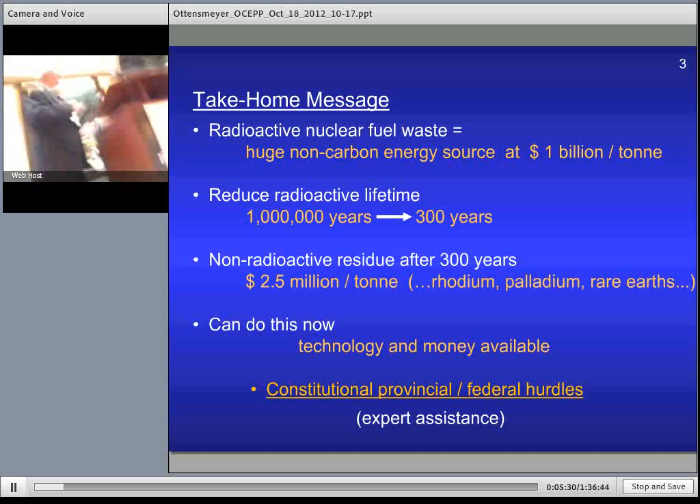So we'll start about looking at what nuclear waste actually is, then indicate where the huge value potentially comes from, because that gives us the incentive to try and do something. Then we'll characterize the nuclear waste, because once we know what it is, it gives us an approach that we can use to extract more energy and do things. People have been thinking about that to some extent, but they've only really tried partial solutions because they have a certain technology to satisfy. But we'll go then directly to the fast-neutron approach and indicate that it's actually existed.

And we can find out what type of fuel utilization has been achieved, and then my calculations that indicate what might be possible. Of course, after Fukushima, there's no talk on nuclear matters that doesn't touch on safety, so I'll do that as well. And then indicate the availability of the technology and the cost, of course. It's always important. So let's start right in.

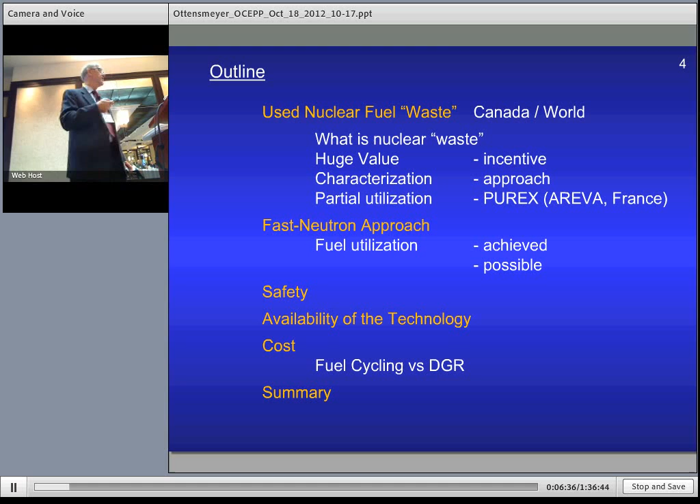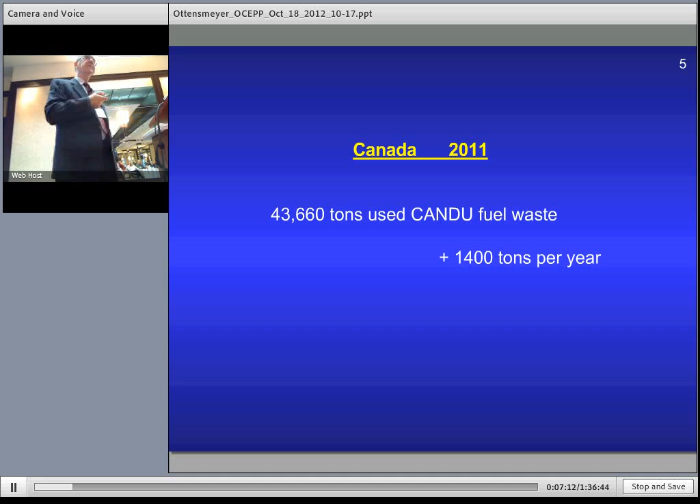Now, we've done studies since the 70s where Professor Hare essentially gave us a report which indicated that we should bury this material in a deep geological repository somewhere in the Canadian Shield. Since then, we've studied the Canadian Shield in an underground laboratory in Pinawa, in Manitoba, and had a panel looking at the environmental aspects and sociological aspects for over 10 years. And their recommendation was to involve communities, because radioactive matters are sort of worrisome in one's mind.

That resulted eventually in the Nuclear Fuel Waste Act, and that created the Nuclear Waste Management Organization. And they were charged within 3 years to come up with a report as to what to do. And so by now we've spent about $300 million or so, and the report says we should bury it in a deep geological repository. Reminds me of 1977. But they were smart enough to say, well, let's do this with some thought. And they chose a so-called adaptive phased management, which says it gives us time. So perhaps I can persuade them to go in a different direction.

A deep geological repository is supposed to be sort of a gallery of tunnels deep underground, 500 to 1,000 meters underground, and it's going to cost us of the order of $24 billion, or if it's twice that size, there's a little bit of economy of scale there, but not much. And following the Seaborn report, they're asking communities to come forward, and they have 22 by now. I think the last report that I've read was that it was 21, so maybe one has been eliminated.

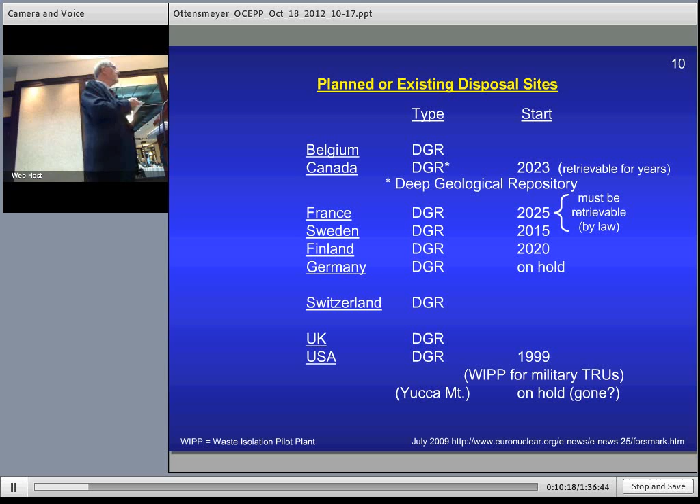And so let's take a look at what this material actually is. Our 44,000 tons have actually only been used to the tune of about 300 tons. And by used, I mean that we've taken the uranium and we've split it to extract the nuclear energy of 300 tons of this 44,000. That's less than 1%, 0.74%. That's why I say it's slightly used.

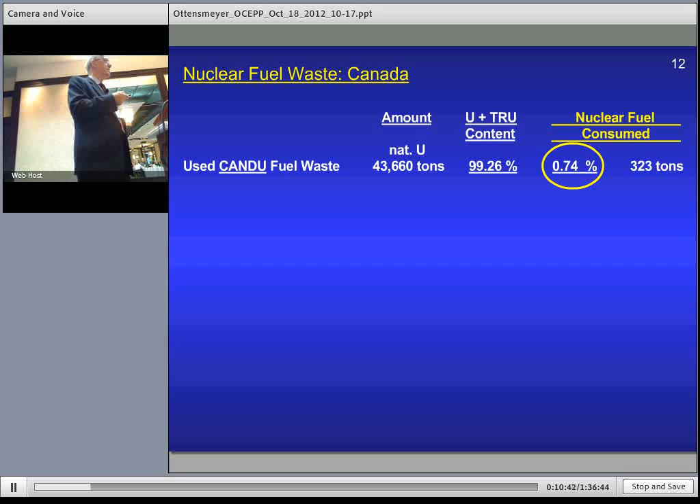The rest of the world seems to be doing better. They have extracted 3.4% out of their so-called fuel waste. But that's deceptive because they use light water reactors, which are less efficient at using neutrons. And so they have to enrich their fuel for uranium-235 that's in the natural uranium. And so what's left is depleted uranium, on the order of 2 million tons that have accumulated since then. And of course, that's not used at all. And so if we consider mined uranium, then the light water reactors have used less than 0.5% of the material.

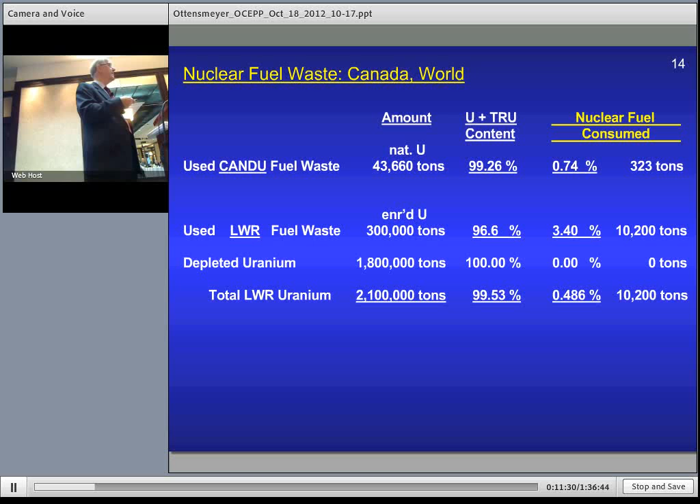And so you can see that the CANDU reactor is a marvelous reactor. It's about 50% more efficient than any other reactor in the world, except the ones that I'm going to talk about. And so even if we add our own contribution, it's still in total less than 0.5% of the material that's been used. So the obvious question is, what if we use more of it, or ideally all of it?

If we take the Canadian case, instead of using the 0.74% that we've used, we use all of the rest of it. And instead of just the 1,400 tons here, we use all of the 44,000 tons. Then that's an easy calculation because it's merely ratios of these numbers. That's down here. And for instance, in terms of the efficiency, we can extract 134 times more energy out of the material than we're doing now.

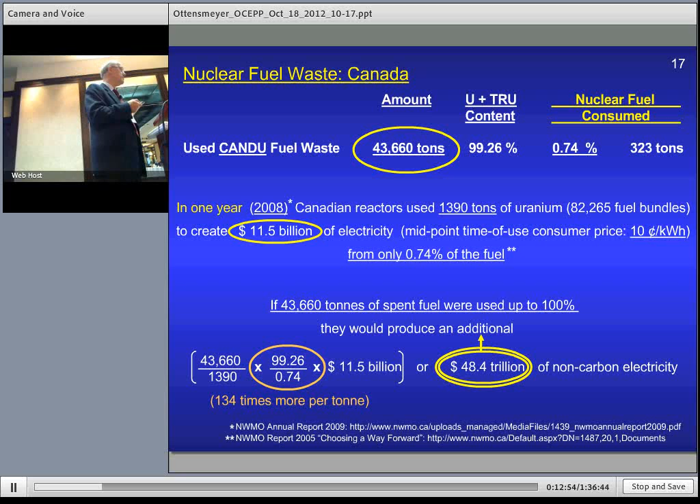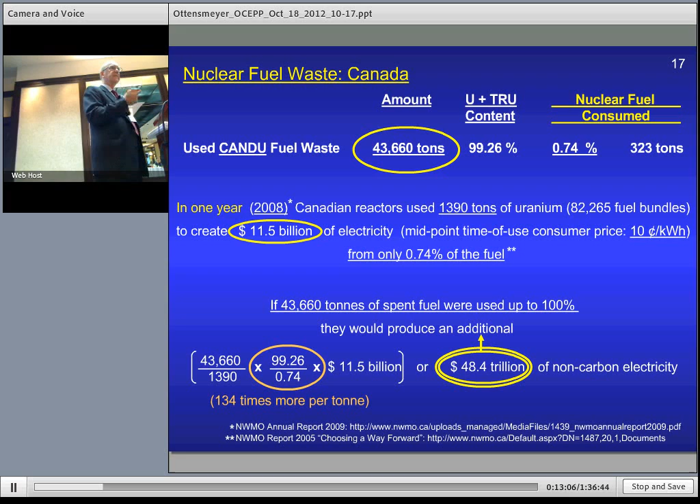And nuclear energy is a lot. So this is enormous. And so if we then take the total number of tons, then the amount of electricity that we could create out of all of that is an additional close to $50 trillion. So I would not call this waste at all. I think it's a tremendous asset. If you look at it differently, this $11.5 billion was created in 1 year, and so the $50 trillion worth would power us at the same level that we create electricity now for over 4,000 years. And we call it waste.

So if you now look at the Deep Geological Repository, which is supposed to cost $24 billion, if we put the material down there and we can't get at it again, then we've lost the order of $50 trillion of energy. And we can make the reactors more efficient so this number can actually go up.

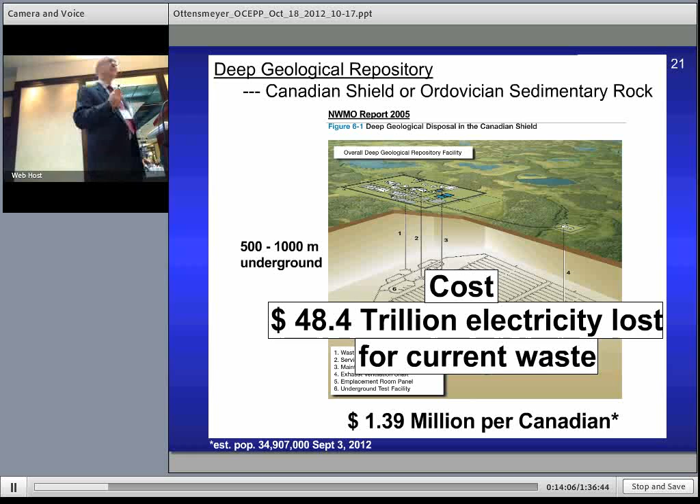Now that's such a large number that I didn't know whether anybody would understand how big that is. And so someone in my lab said, well, that's easy, just divide by the population of Canada. And that means that this amount is $1.4 million per Canadian that we would put down into this Deep Geological Repository. So I would say that I don't want my $1.4 million to go down there. Perhaps you don't either.

So let's take a look at some more detail, and this is where I perhaps become more professorial. The fresh fuel, the uranium, is actually made up of two types of atoms, the uranium-235 and uranium-238. There's very little uranium-235 there, but that's the material that's used in CANDU reactors. It's called fissile because it splits very easily with the slow neutrons that are used in CANDU reactors and also in light water reactors.

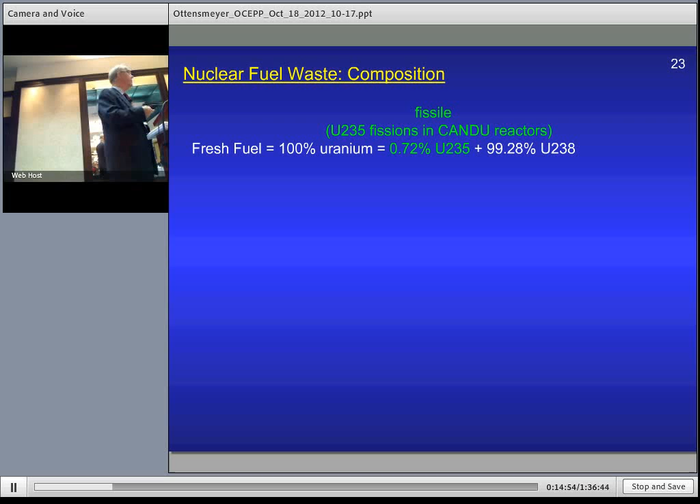Once that material comes out of the CANDU reactor, 0.74% of that has been converted into fission products. Those are the split atoms, and that is indicative of the energy that's come out. So that's 0.74%. The rest is still heavy atoms, uranium and something called transuranic actinides, which actually are atoms heavier than uranium that are created in the reactor.

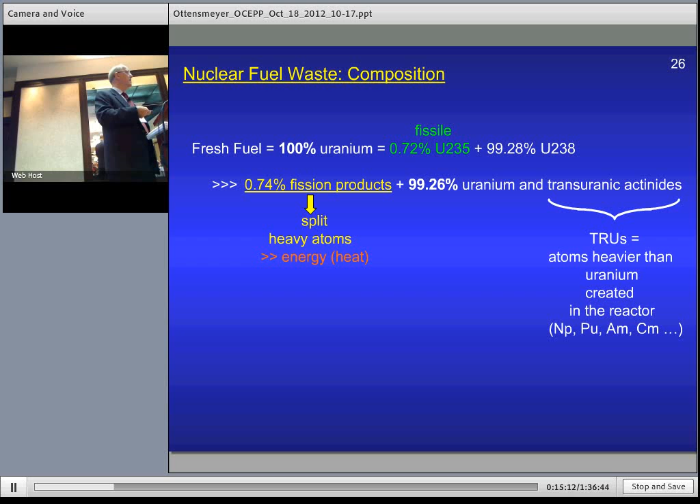If uranium absorbs a neutron, like U-238 does, it becomes neptunium, which then kicks out an electron, becomes plutonium, then americium, then curium, and so forth, and it becomes heavier and heavier. Those are the transuranic actinides. And all of these together have this radioactive lifespan of close to 1 million years.

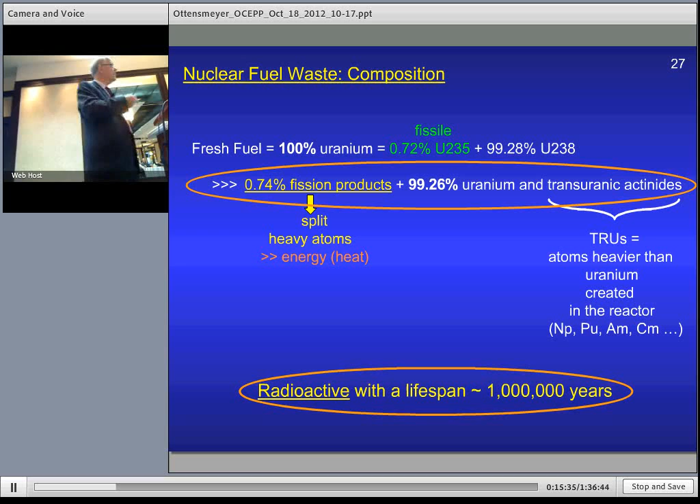But if we look at the details, it turns out that this graph indicates radiotoxicity, which is radioactivity normalized to the biological effect it has. So it's the injurious part. And our CANDU fuel waste, when it comes out of the reactor, and these are factors of 10 here, it's a log scale, is about 1 million times more radiotoxic than the natural uranium that went in. Okay? But it decays away and then stays there

until it reaches the level of natural uranium at about 400,000 years. But the detail is that the transuranic actinides, the heavier atoms that are created in the reactor, are the ones that have the long lifetime. Whereas the fission products follow this green curve and hit the level of natural uranium at less than 300 years. So if we could get rid of the heavy atoms altogether, then we'd be left with just the fission products. And what would be the quantitative benefit in terms of radiation there?

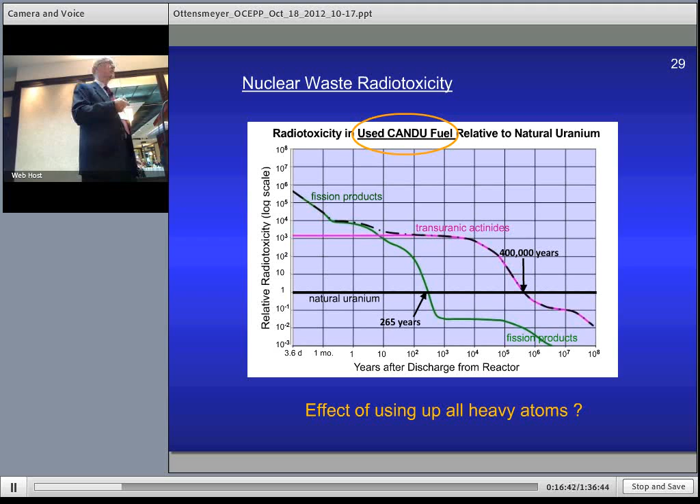Well, essentially at 300 years or so, the radioactivity would be down by a factor of 1,000, but it keeps on going down so that at 1,000 years it would be down by a factor of 42,000. That's a tremendous reduction in radioactive burden.

Or you could look at it differently and say we can reduce the lifetime from 400,000 years to less than 300. And that's a factor of 1,500. That's 3 orders of magnitude. That's an engineering quantity, or almost an astronomical quantity. So that we end up with fission products which eventually are actually 30 times less injurious than the natural uranium from which they were created.

So we have 3 huge incentives here to use up the heavy atoms. We get a very large reduction in the radioactive lifetime, a very large reduction in the long-term radiotoxicity, and we have this 134-fold gain in non-carbon energy. But in addition to that, there's a little bonus for our descendants, because after 300 years, the fission products are essentially non-radioactive. And the 40,000 tons of spent CANDU fuel at that time would be worth the order of $100 billion, or $2.5 million per ton, which I mentioned earlier on, because of the contents of all of these wonderful atoms that are in there and ready to be extracted without having to be mined, because it's already there.

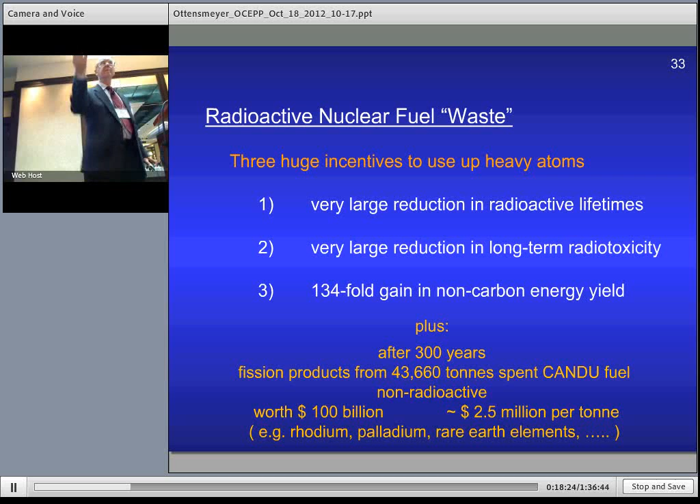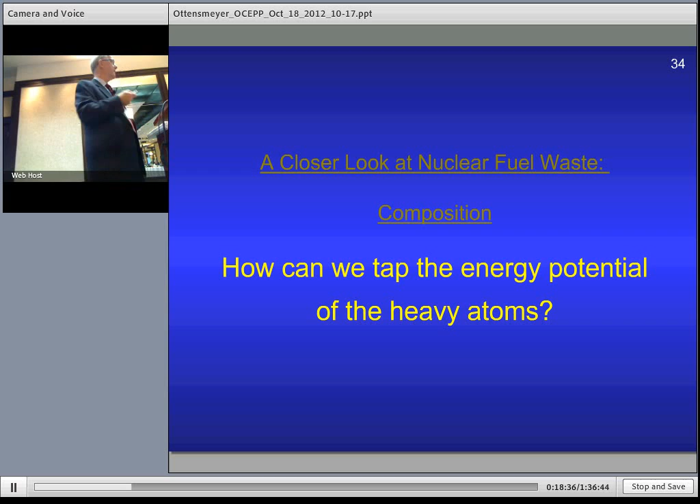So how can we tap the energy potential of these heavy atoms? Let's take a look at my professorial approach again of looking at what the heavy atoms actually are. The fission products have released the energy already, so we're just looking at the heavy atoms. It turns out that, in addition to the uranium that's there, we now have plutonium and americium and curium and neptunium and so forth. But some of these are actually what's called fissile. In other words, the same as the original U-235. And then they can be used in light water reactors, in CANDU reactors, and so forth. And so the world's concentration has been to try and extract these fissile elements.

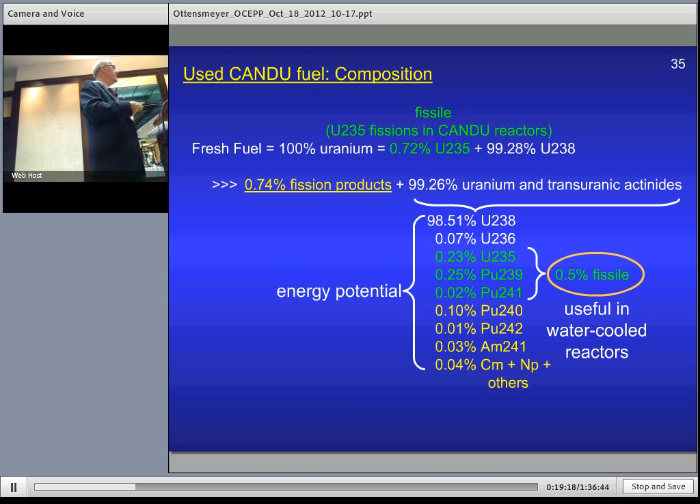What's been tried are things like fluoride volatility, or a chemical process called Purex, or accelerator-driven systems, or laser-driven systems nowadays. But the only one that's really been used is Purex. And it's still being used now by Areva in France to cycle their light water reactor so-called spent fuel, because it has still 0.9% plutonium that's fissile in it. And so they think it's worthwhile to do that.

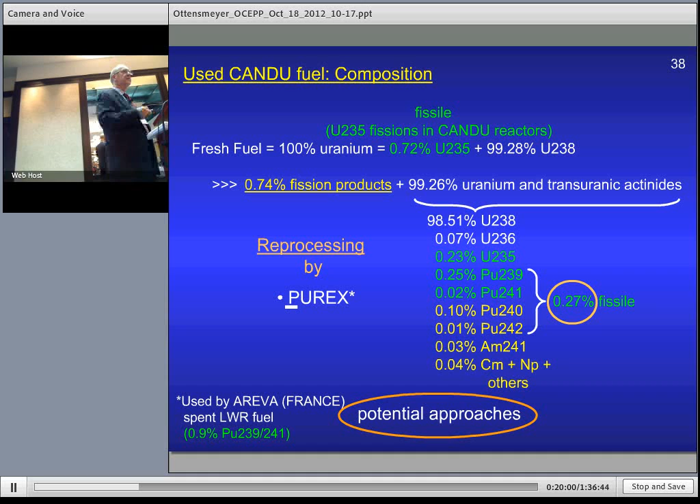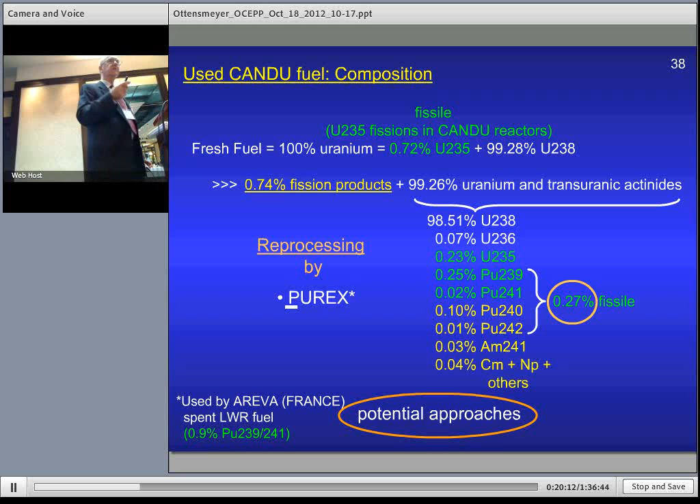If we look at our case here, then the Purex process would extract 0.27% of fissile material in terms of the plutonium that's there. And that's about 1/3 of the original fissile material there. So we can get something more out of it, but it's a major effort. And the Nuclear Waste Management Organization looks at what they call a watching brief and to see what's out there. And they have decided that reprocessing of CANDU fuels would be prohibitively expensive and would require decades of research to prove its feasibility. That's a quote from their annual report.

Now, I'm a university professor in research, so if it says decades of research, I think this is wonderful. But being a grandfather and retired, so I look at my pennies a little bit more, it's prohibitively expensive, and I don't like that part. So is there another approach? And being naive, you might ask, well, why don't we split all of the heavy atoms to extract their energy?

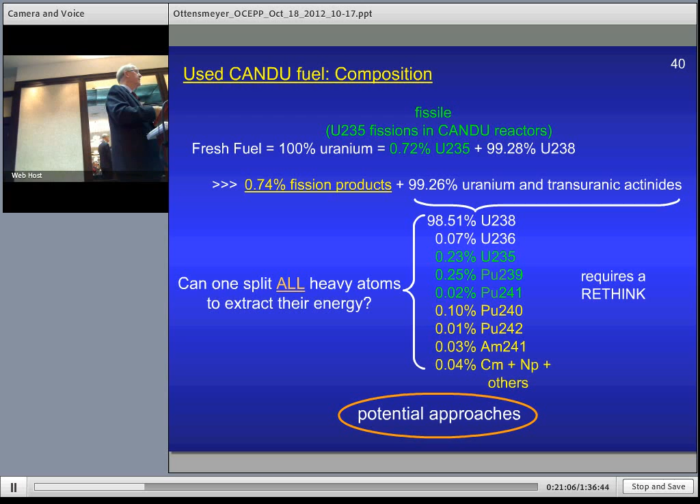No question is ever bad. It's the answer that you worry about. And this requires a rethink, really. And the rethink started with me with a CANDU reactor at equilibrium to see where the energy came from. And I got this from Ben Rouben and also from CanTeach, CANDU, and so forth. I usually put my references somewhere on the slide because I'm not responsible for all of them. I just look them up.

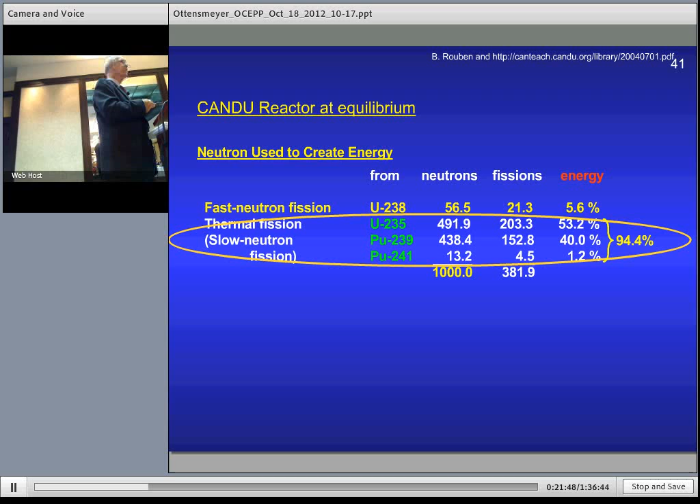And so you find that about 95% of the energy that we get is, of course, from slow neutron fission. We use slow neutrons in these reactors. But the interesting thing to me was that 5% of the energy we actually get from uranium-238, of which we have a lot. And that's by fast-neutron fission. Because when the uranium splits, it gives out fast neutrons. And before those fast neutrons get out of the fuel rod, they find another uranium, and they don't care which one, and split it. Once they're out of the fuel rod, the water slows down the neutrons. And then, of course, they become very efficient at splitting the fissile material. But they don't touch U-238 by a factor of about 50 million.

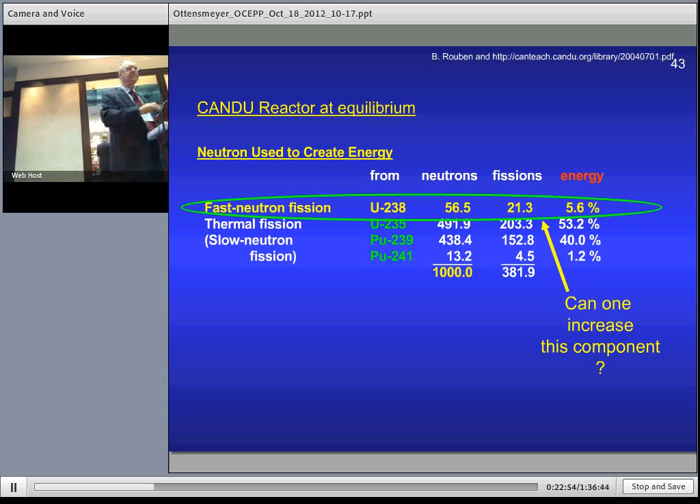So the question is, can one increase this component? And I tried very hard in my calculations on the previous version of this laptop, and I couldn't do it. It was the water that really prevented one from having fast neutrons, because water very efficiently slows down neutrons. And so on the laptop, it's easy to just leave out the water. And then things worked. But that's not an engineering solution. A reactor creates heat, and you have to carry the heat away someplace.

And so, being a metallurgist, I grabbed my metals handbook and looked up low melting point metals. And you're familiar with them. Lead is one of them. It's got a melting point of about 350 degrees Celsius, which is a little high. But this stuff here, solder, works just as well. And since tin absorbs neutrons, you get a solder that's lead bismuth. That works wonderfully well. The Russians have used it. Lead bismuth is expensive. And so an alternative is to use sodium.

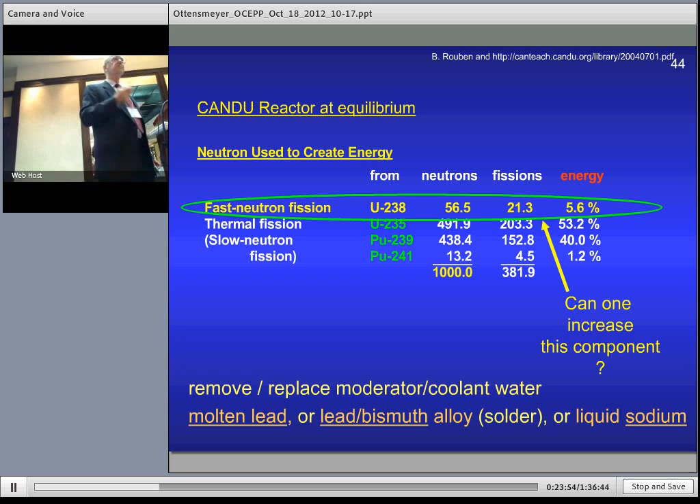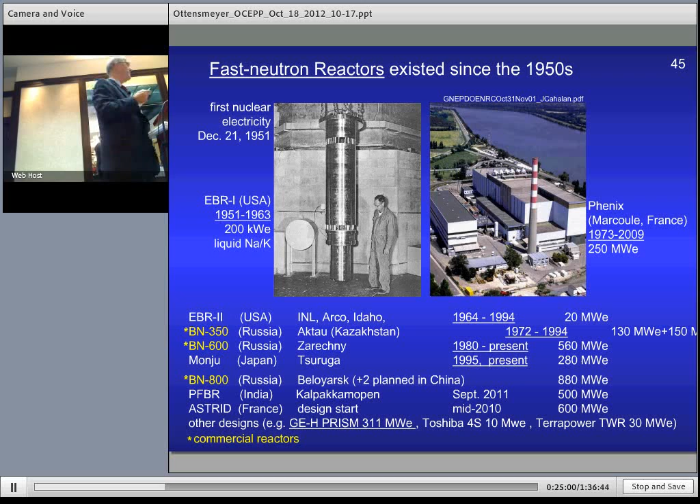But all kinds of reactors of different sizes are fast-neutron reactors that are metal-cooled. I'll talk about the EBR2 in great length a little while later. The French, of course, know where to build them. This is the Rhone Valley there. It's very pretty. We go to Chalk River, and the Ottawa Valley is pretty as well, but it's so far out of the way. It's about a 6-hour drive from where I am. But since these reactors existed and still exist, the Russians have commercial ones and they're still running, how well can a fast neutron reactor use fuel in terms of percentages?

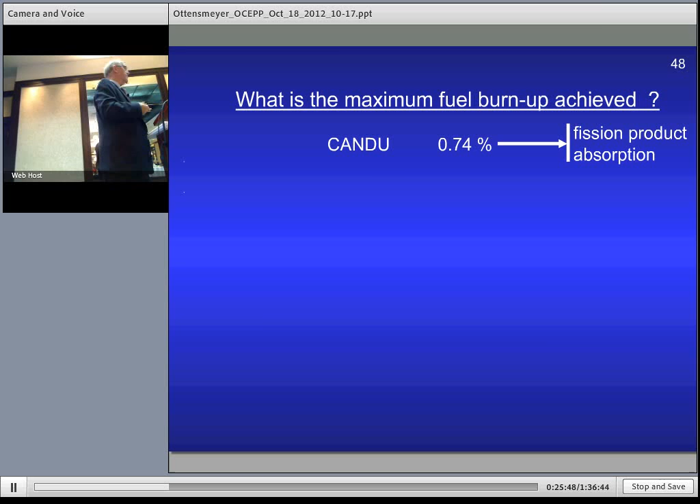Well, the EBR2 gave us lots of data. It ran for about 30 years, and it gave us data on fuel burnup. I'm not supposed to use burnup because it's not really burned. And on fast neutron reactor safety. I'll get into that a little later. We know in the CANDU reactor, the reaction stops in the reactor after about 0.75% of the fuel is used because of fission product absorption. Neutrons are absorbed by fission products. In the fast neutron reactor, in the EBR2, it started out between 1 and 3% and went up to about 25% over time.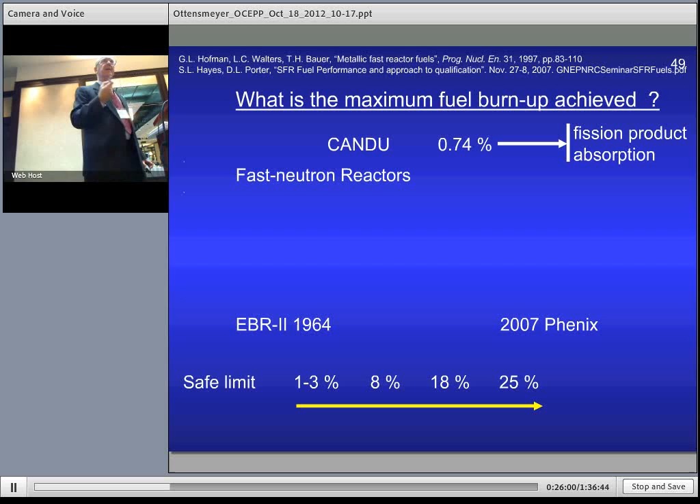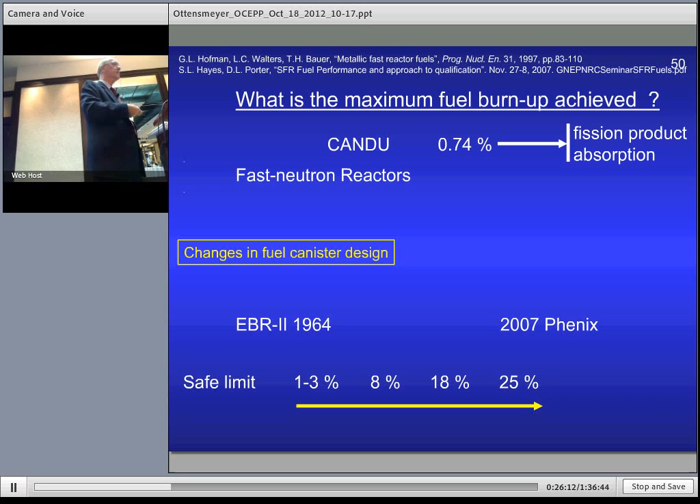And that was not because they built a better reactor. It was because engineers designed a better fuel canister, which is basically this little can here, because a fuel rod is a very simple device. It's a can full of uranium. And in '64, they stuffed as much uranium into the fuel can as they could. And they found that they could use it for about 1 to 3%, which is not really very much better than thermal reactors. And at about 5%, the canister failed. And it failed due to the swelling of the fuel, and that's quite natural.

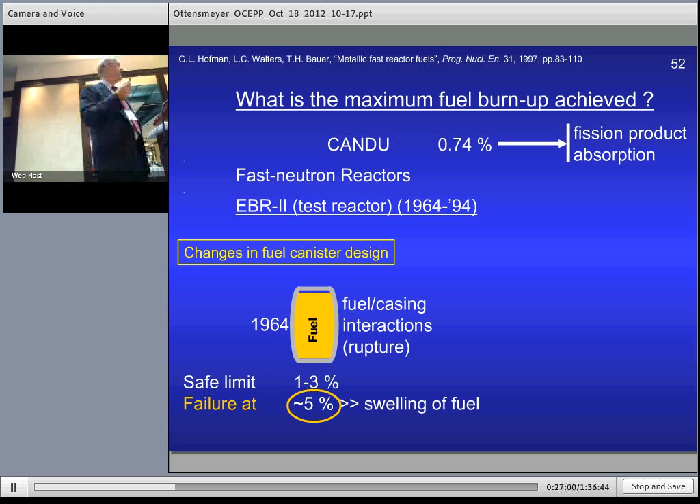Uranium, when it splits, creates 2 atoms. And even though they're the same weight as the original uranium, they're of a slightly bigger volume together. And so as the reaction proceeds, the fuel swells. And so they scratched their head for a while and came up with the engineering solution not to put as much fuel into the canister, but put fuel at a level of 75% of the canister cross-section.

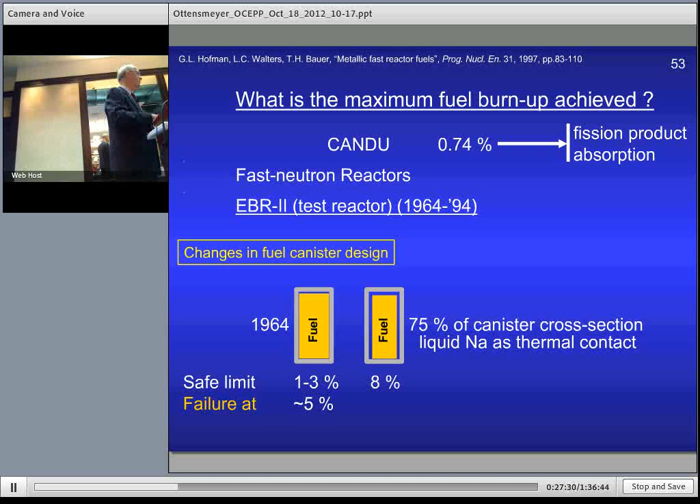And then, of course, it doesn't touch the canister anymore, and you need a thermal contact, so they used liquid sodium inside the fuel canister to provide the thermal contact. And they went up to 8%. And being a test reactor, they tested to failure and found that at around 11%, the canister failed again. And this time due to gaseous internal pressure, because some of the fission products that are produced are gas. Xenon, krypton, iodine, when it gets hot, is a gas or a vapor.

And so, having done this once before, they decided to put a larger space into the fuel canister, an empty space, a plenum, for the gas to expand into. And they immediately went up to about 18% on a regular basis, and they were quite happy with that for the longest time. And they used and recycled about 34,000 fuel pins, that's about 5 reactor loads, quite safely during that time.

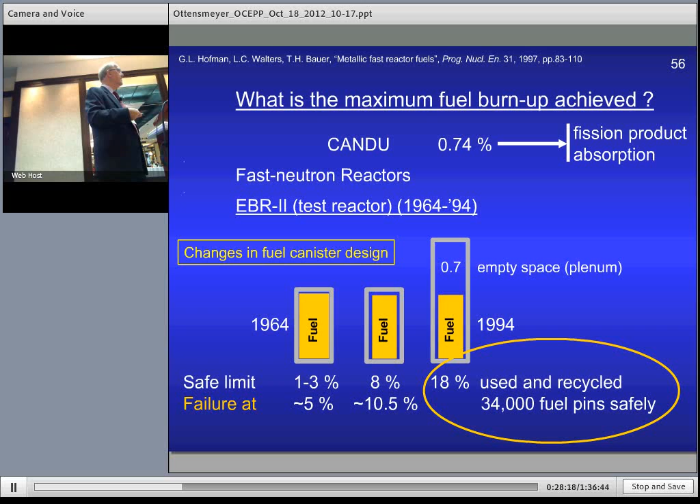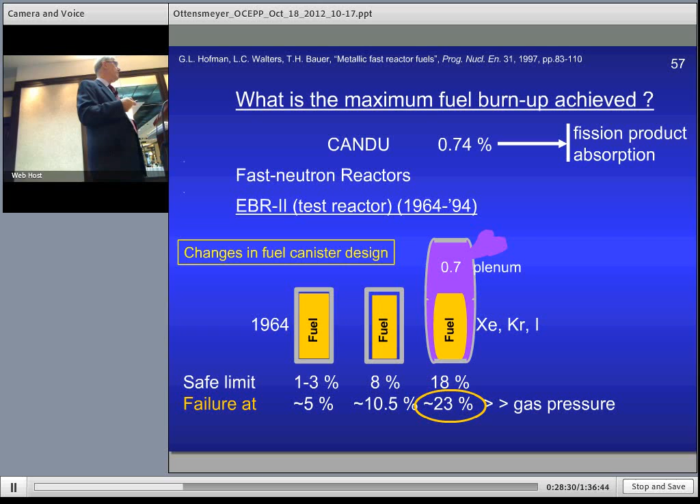They tested to failure again and found that failure occurred again due to increase in gas pressure at around 23% fuel burnup, fuel usage. And so when the reactor was shut down in 1994, the Americans continued the experiment, but now used the French Phenix reactor and designed a canister for about 25% potential burnup. And they achieved that in the French reactor, but they never tested to failure because they were guests in the French reactor. You don't do that sort of thing in somebody else's house.

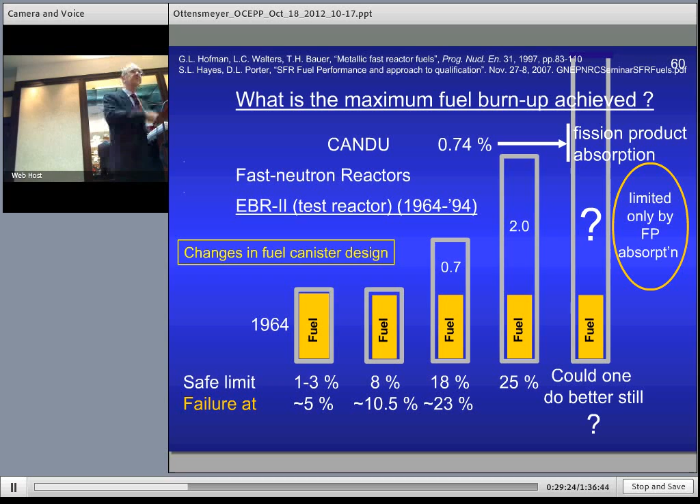And so the question remained, how far can one drive this? Could one still do better? Because maybe the limitation is still pressure inside the can. So if you design an ideal can where the gaseous pressure is not dominant, then you can go to the point where it's neutron absorption by the fission products that are created, because eventually you'll have so many fission products that it'll absorb the neutrons and the reactor just will shut down. And the short answer, after I would say a massive calculation, is about 35%.

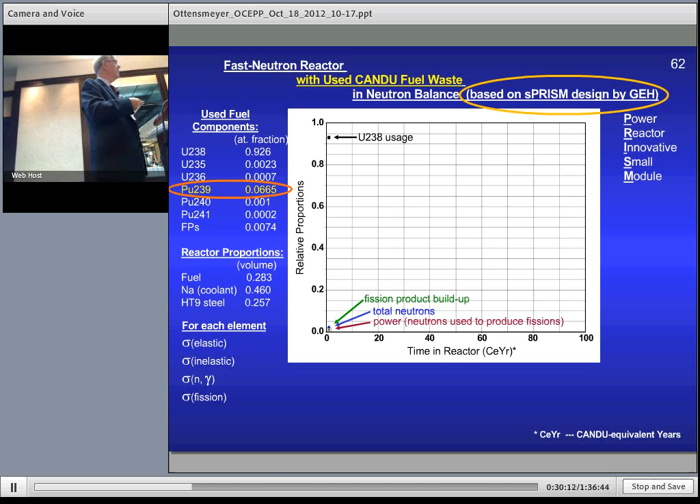And I won't give you the calculation because that'll take about an hour and a half of wonderful data. But I'll indicate to you some of the data. I've got it for all of the different elements with respect to time in the reactor of this fuel. I'll use U-238 because we've got a lot of that, and then indicate the fission product buildup and the neutrons used to produce fissions, because that's the power that we get out of a reactor. Okay? And so the CANDU refuel point would be right about there after 0.75% of use of the fuel. In this reactor, it keeps going and going and going, and it stops eventually asymptotically at a close to 50% fuel usage. That's pretty big.

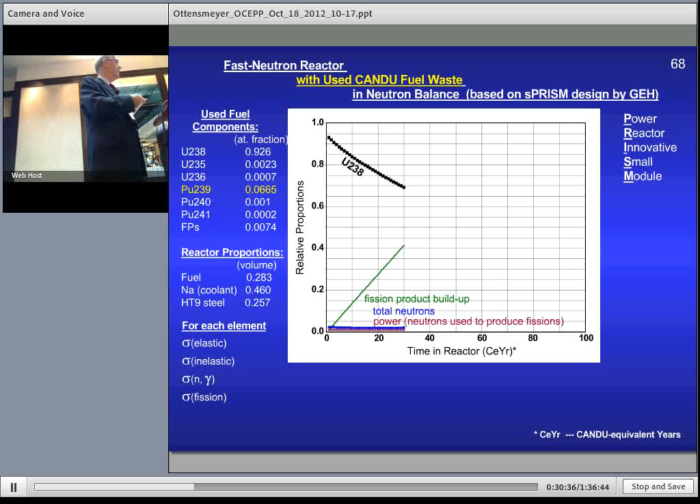But if we want to create electricity, then we want the reactor also to remain constant in power. And so since we've got that data but squashed on the axis here, let me expand this. And you see that we can keep the power constant up to a certain point, and then it just sort of decays away because the fission products absorb too many neutrons. And so this would be roughly where you want to refuel. Now at that point, you haven't used up 50% of the fuel, but only 36%. Now I say only 36%. That's about 50 times more than what we use in the CANDU reactor.

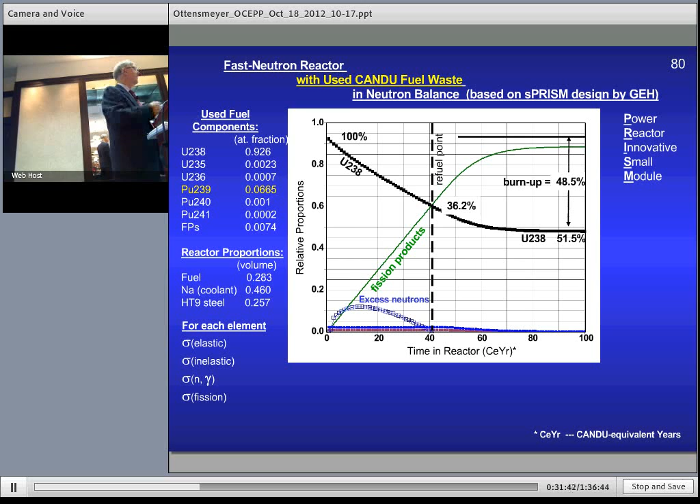Now the reason that we can't maintain the power is that to control a reactor, you actually need a few extra neutrons, which you regulate then with the control rods. And so you have excess neutrons, which you regulate the way you normally do, until the fission products become so copious that they absorb too many neutrons, and the excess neutrons go to zero. So at that point, then you refuel. Then you take out the fuel bundles in this particular case, extract the fission products, because the fission products are what stop the reaction. And then you put the rest of the heavy atoms back into the reactor. Now, we've used up 36% in this case of the heavy atoms. So we want to top this up back to the original charge.

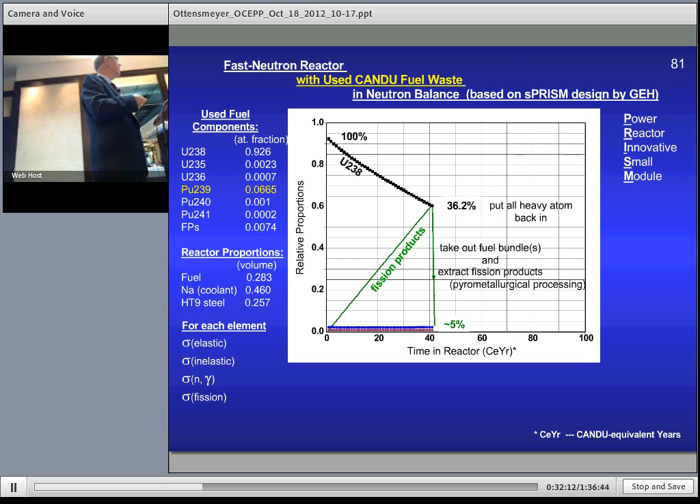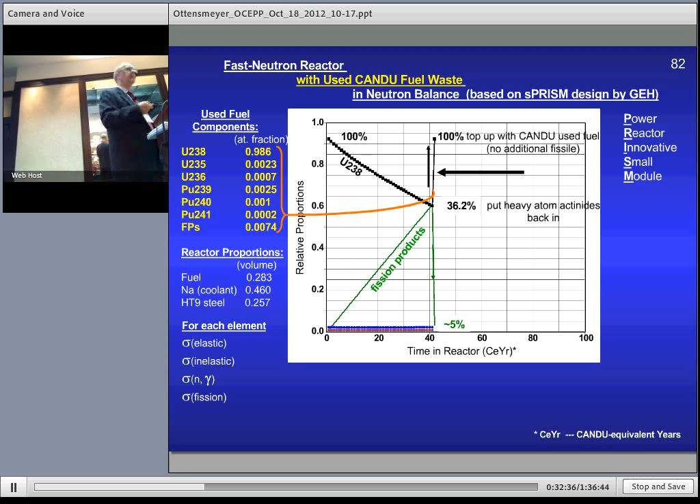And for that, we use CANDU used fuel, because CANDU used fuel is mostly uranium-238, which we've used up quite nicely. And then it's got all of these other transuranic actinides, and it's got some fission products, but less than 1% fission products doesn't bother this reactor at all. I mean, it can go up to 36% by weight of fission products. So that's nothing. It's just like fresh fuel, basically, as far as this reactor is concerned. And then you just keep on going and going and going. And every time that you do this, you use up about 35% of the fuel, which is replenished using just plain old used CANDU fuel, waste. And so in 3 cycles, we would have used up 1 reactor full of CANDU fuel waste completely.

Now I've got one of the transuranic actinides here, the plutonium-239, as an example. Now you know that builds up in the CANDU reactor, and so do the other actinides. But you see here, it sort of increases slightly and then goes back down as the U-238 goes down. Some of this gets used up. And by the time you refuel, you're back at exactly the same concentration that you started with. So it doesn't increase at all.

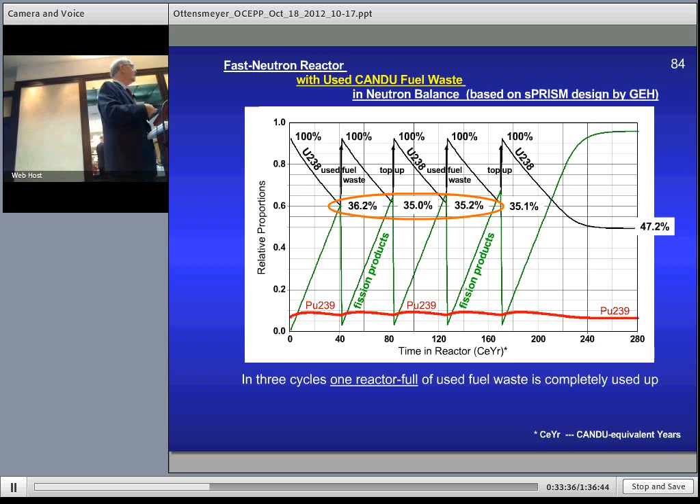If we look at the other actinides, plutonium-240 behaves exactly the same way. Plutonium-241 this way, and uranium-236, which is created from uranium-235, comes in and then gets used up as well. This reactor doesn't care whether it's a fertile material or a fissile material. It just splits them. There's one thing I should mention here, and that is the plutonium-240 content in relation to

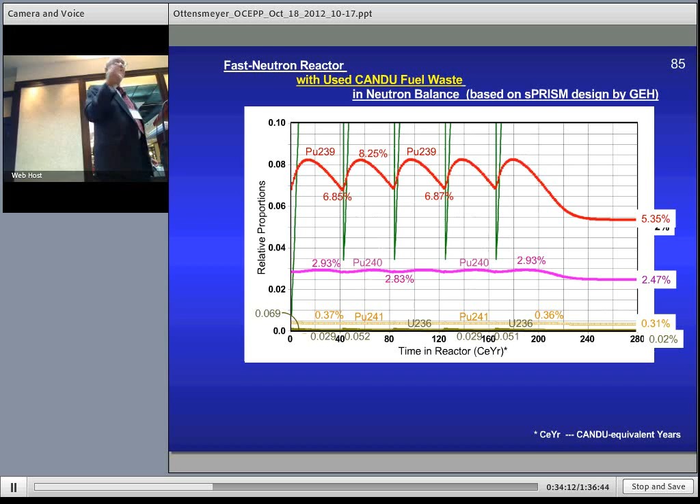plutonium-239. This is what makes this process relatively proliferation resistant, because you can't use this material to build a bomb. You need high purity plutonium-239. And here you've got the order of 30% of plutonium as plutonium-240. So it just doesn't work that way.

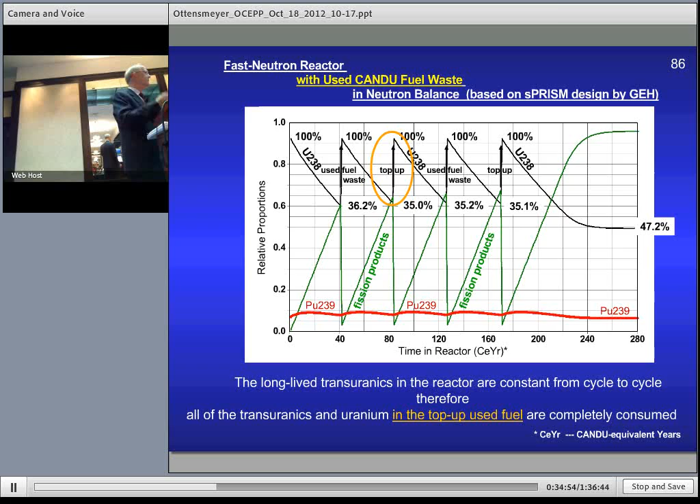So since the long-lived transuranic actinides in the reactor are constant from cycle to cycle, except for this variation within the cycle, we can say that all of the transuranics and uranium that come in with the top-up portion are used up at the end of the cycle completely. And so that means since they're used up, that also eliminates the long-term radioactive burden that is in the current spent CANDU fuel. So if we look at this curve again, the transuranic actinides are gone, and we're down to this particular situation.

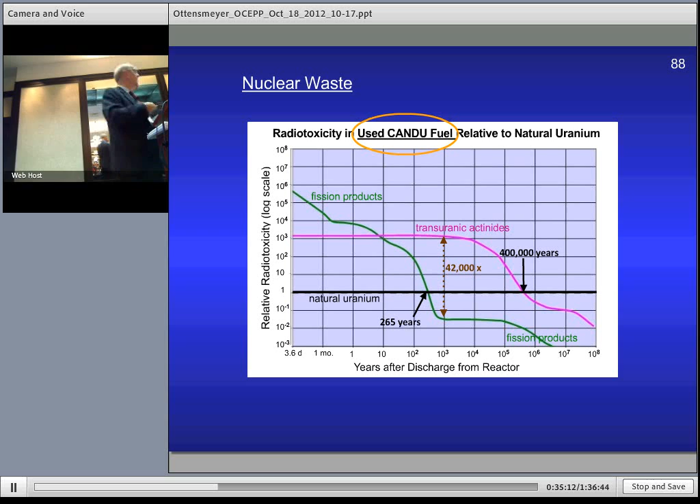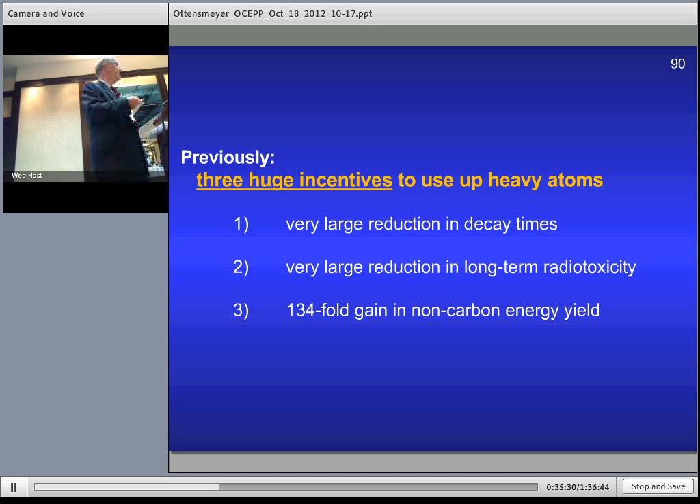So if we look at our 3 huge incentives that I indicated before, we've actually achieved that with using a waste-consuming fast-neutron reactor. And so we can now ask some practical questions. Is a fast-neutron reactor safe? Or can we build or purchase one? We can always build one.

You know, the EBR2 plans are actually sort of in a book you can get in the library with machine drawings in it and dimensions. It's amazing. Can we build an efficient fuel cycle facility? And then finally, how does such a fuel cycle process compare to putting the material down into a deep geological repository? I indicated that the EBR2 in its life, the 30-year life, also provided data on fast-neutron reactor safety.

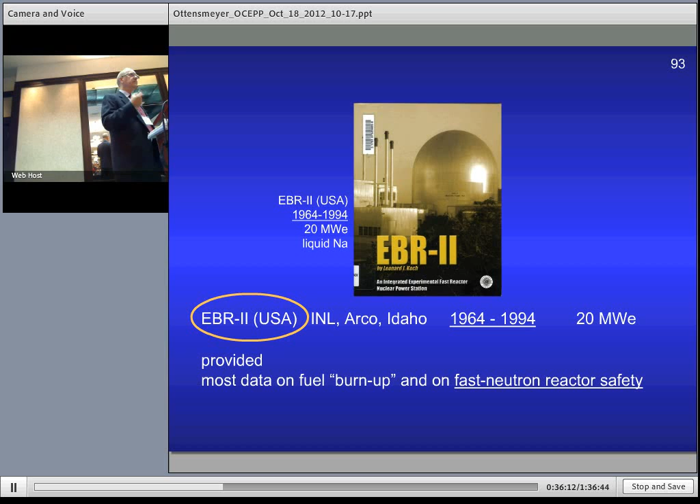And this is very important. The reactor itself is sort of partially underground, and it's the square little box, which I will enlarge next. But in 1986, during its life, they tested this reactor under electrical blackout conditions. That's very similar to what happened in Fukushima, because they lost their electricity, they lost their batteries, they lost their diesel generator backups and so forth, and so there was no electricity. And so they simulated this, obviously, before Fukushima.

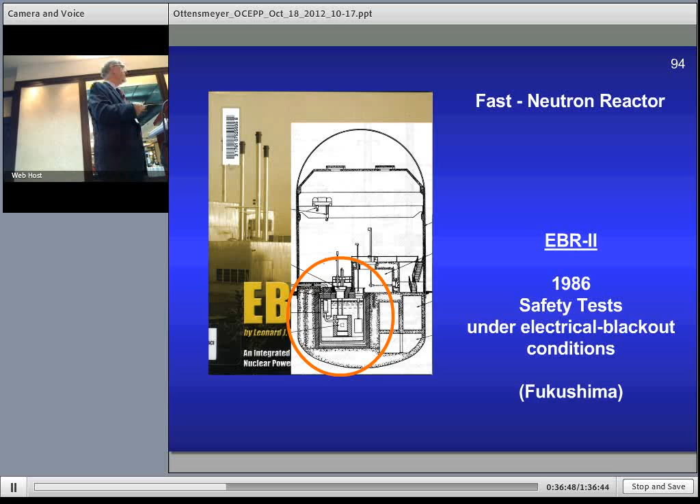This is the reactor tank here. It's basically like a bathtub without a stopper in the bottom, so it's solid. The fluid really can't get away. Any access is via the top lid. The reactor vessel itself is submerged in the liquid, in this case liquid sodium. It could be lead bismuth. And it's got a primary pump here, which pumps the fluid through the reactor core, past the reactor rods, and into an intermediate heat exchanger here, which has a circuit which takes non-radioactive liquid sodium in this case, and heats it up and pumps it out. So all of this is non-radioactive because it never enters the core.

One could use an organic liquid here if you don't like liquid sodium. That's been used in Whiteshell by our own AECL. So that exists. And what they did in their safety tests was inactivate the pumps and also immobilize the control rods. Now, who would do a foolish thing like this? But they did it. And you'd expect this thing just to heat up and melt down.

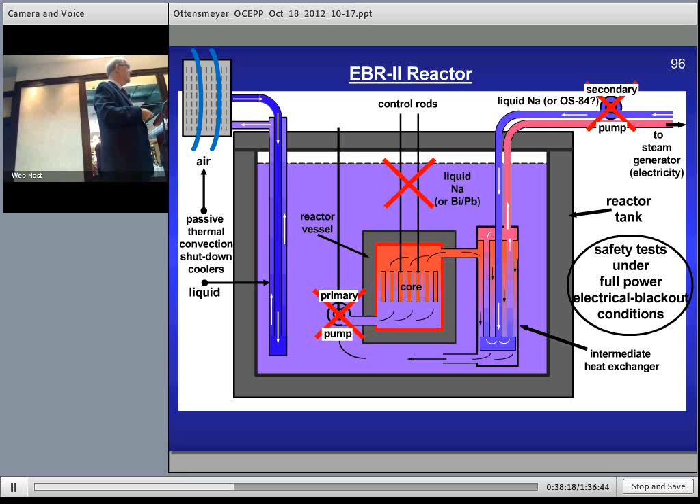Well, the beginnings of that perhaps worry you. This is where the experiment started here at 0 time, and the temperature went up and up and up. But when it reached 750 degrees from 470, it turned over and went back down again, and within about 5 minutes it was back down to where it was normally operating and below. In other words, the reactor shut itself down, even though they had shut off the pumps and inactivated the control rods. I think that's marvelous. It has such a strong negative temperature coefficient that as this went up, the power just shut off.

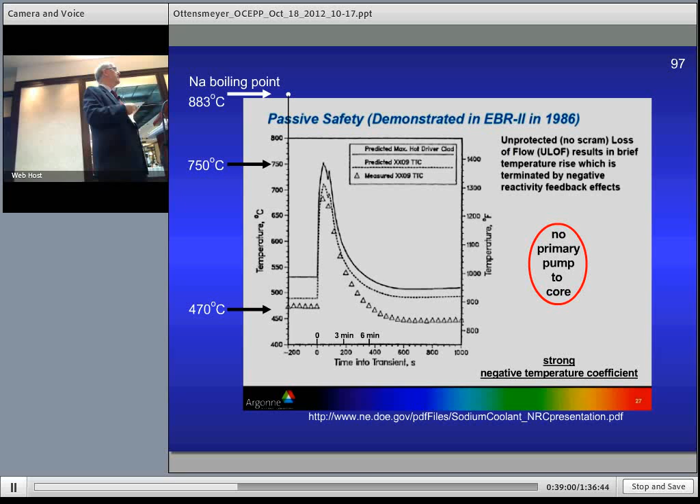Now in Fukushima, the problem was really the decay heat removal, because once you shut the reactor down, which they did in Fukushima, the fuel rods still emit a lot of heat, and they do that in a reactor for the order of 2 weeks or longer before it's reasonably down. So in this case, what happens? Well, obviously the

liquid in the reactor tank heats up, but they actually installed already, for normal circumstances, for normal shutdown, 2 thermal convection coolers, which required no power at all. It was just the property of the liquid. As it heats up, it rises, becomes lighter, goes out of the reactor building, and the heat is dispersed by a second thermal convection cooler by air. Hot air rises, it's heated up and goes through, and then the cold liquid comes back down and so forth. And they had 2 of those.

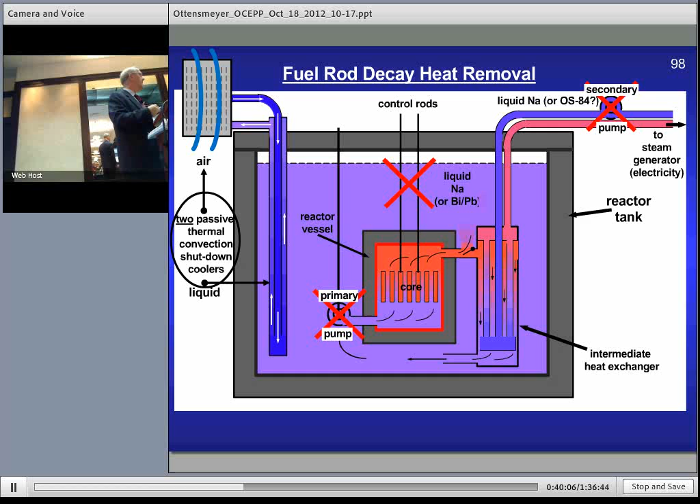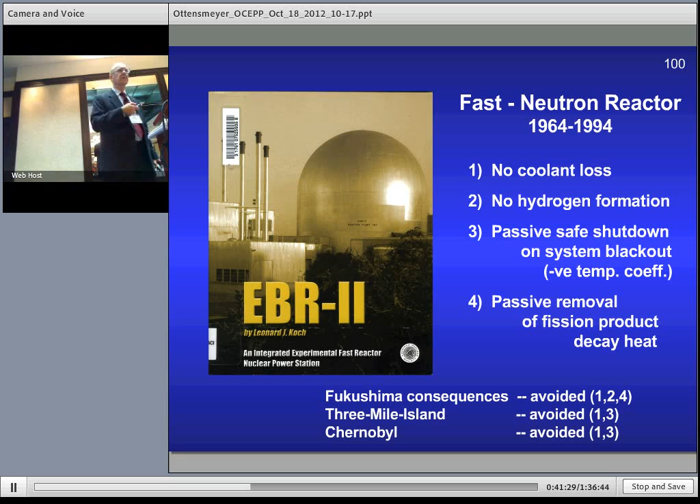So, in effect, we had safety features which gave you no coolant loss, which was important in some of the other accidents, no hydrogen formation, because obviously there's no water here. It shut down passively on system blackout because of the strong negative temperature coefficient. And we had passive removal of fission product decay heat. So this reactor would have avoided the Fukushima consequences for 1, 2, and 4 here. It would have avoided the Three Mile Island problems because there was no coolant loss there. And similarly, Chernobyl, there was no coolant loss in this reactor. And that was operating from 64 to 94. So I think it's fairly safe.

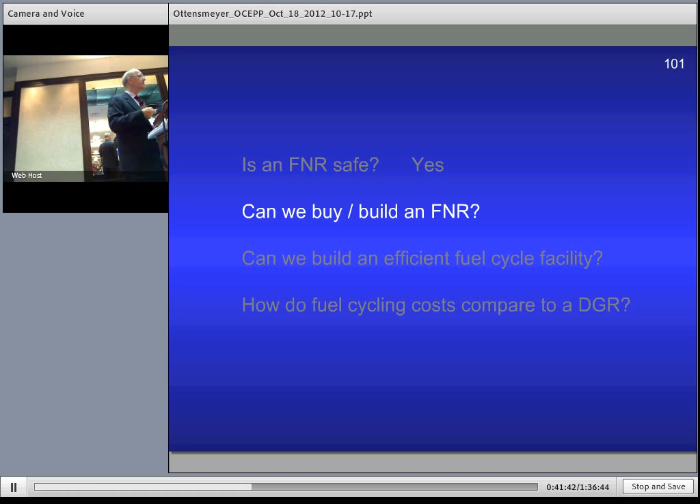Can we buy or build a fast-neutron reactor? Well, we can always build, but it turns out that we can actually buy. We can go to the Russians, who have reactors, the Indians. We can go to the Japanese, who shut down theirs lately. We can go to the French. And so, maybe one closer to home appeals to you more. And it turns out that GE Hitachi designed the PRISM reactor.

So I went to them and said, what does it cost? And they said, well, it depends on the country and the various ifs, ands, and buts, and so forth, and environmental problems and lawyers and so forth. So they wouldn't give me an answer. But they're offering this reactor to England, to the United Kingdom, to take care of their excess plutonium. And they are going to give that reactor free, except they're going to charge them for every kilogram of plutonium that they use up.

But in the process, one of their executives mentioned in the newspaper, and I couldn't find it immediately, but I remember it quite well, that this reactor would be equivalent in cost to one of the large light water reactors, and that's about 1,000 megawatts. Since this one is 600 megawatts, then it's about a factor of 1.5 more in cost. And since this is a first of a kind, we can compare that to historical reactors. In Russia, for instance, comparing their reactor to a Russian light water reactor, it was about 1.5 times more and so forth, and 25% and 30% more in the various other countries in these comparisons. So that's sort of reasonable. It should be cheaper once we build more of them.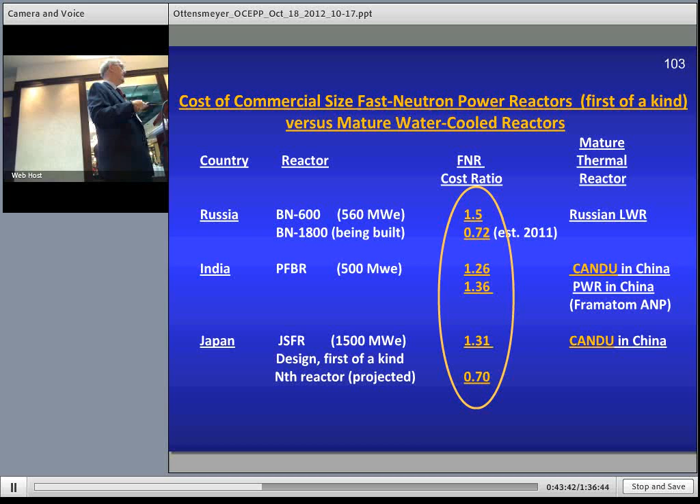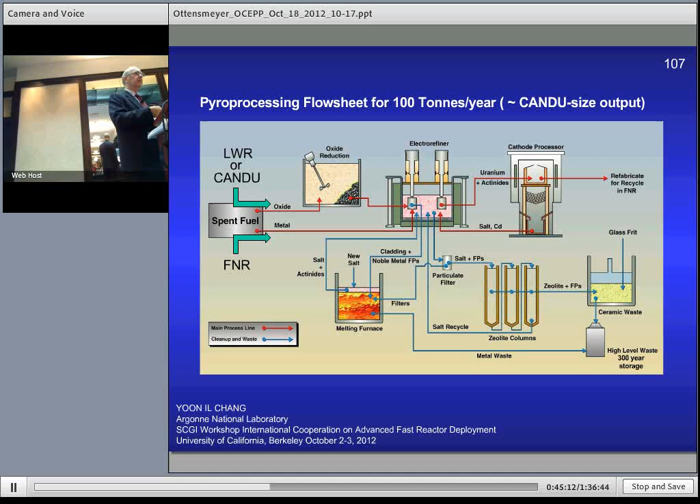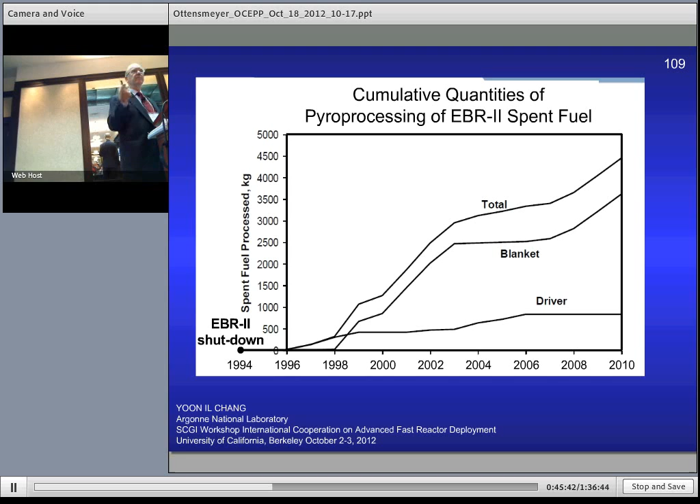And this is not illusory, because these things actually exist. This is the electro refiner, obviously before it was put into operation. And a smaller version of this has been working since 1996 on the EBR-2 spent fuel, once they shut it down in 1994. And it's still operating, as you can see here, probably go higher than this in 2011 and 2012. So it's not something that doesn't exist except on paper. It's real.

So you can ask, how efficient is it? The Argonne people indicated that the current version of the pyro process features efficient, more than 99.9% recovery of the actinide elements. That means that those elements have been taken out of the fission products, which is what we're interested in. And that says that the long-lived actinide content in the fission products is reduced by a factor of 1,000 or more. And what does that mean in terms of radioactivity? Well, the radiotoxicity at a factor of 1,000 is back down to natural uranium metal. And so since it'll be 300 years before we want to get at the fission products, we've got 300 years of chemical expertise to use to try and do better than this. Okay, but we can get it down to that level already, which is good.

So how do fuel cycling costs compare to a deep geological repository? Well, Till and Chang at the Argonne, since they're operating that thing, made an estimate for a 1,000 megawatt reactor, and the facility would cost of the order of $100 million. It's a lot of money, but once you realize how much electricity you can produce with this fuel, it turns out that the cost is about 0.4 cents per kilowatt hour.

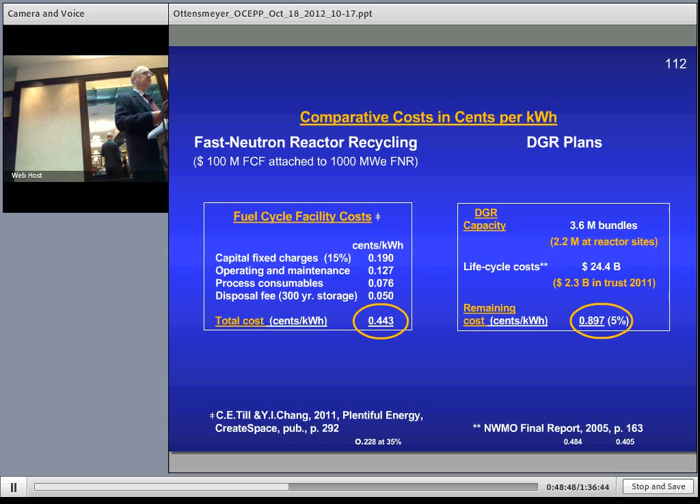So we've got 1.4 million bundles to go to collect the rest of the somewhere $20 billion in future. So the remaining costs, assuming that they don't put it under a mattress but actually earn some interest from it, would be of the order of 0.9 cents. Interest isn't very high at the moment, so this is reasonable. You can calculate for a different number as well. But that says that the fuel cycling approach for a fast neutron reactor is about less costly by a factor of 2 than disposal in a deep geological repository.

But there are human factors as well. I mean, we've got these 22 communities somewhere in northern Ontario and Saskatchewan that want to have one of these deep geological repositories because, you know, there's $24 billion attached to that somehow. But if we look at that and say, well, instead of a deep geological repository, why not build them a fast neutron reactor and fuel cycle facility? That has tremendous advantages. It gives them highly skilled jobs for, well, Pickering and Bruce are examples of what kind of jobs there are. Whereas the Nuclear Waste Management Organization indicates that most of the local jobs are going to be transport and service and catering and this sort of thing. They're going to be of the order of hundreds of jobs according to their triennial report in 2008 to 2010.

In Pickering and Bruce, of course, it's a collection of plants, but the U.S. estimate is that one has about 500 highly skilled people working per plant. And that's going to last centuries because we've got lots of used fuel to process. Whereas once we've built the DGR and filled it, the jobs are gone. Whereas in this case, if they have something that produces energy, they can use it and they can sell it. And we know that the more energy you use, the higher your standard of living. So this is going to increase their standard of living tremendously. So I think it's a real advantage.

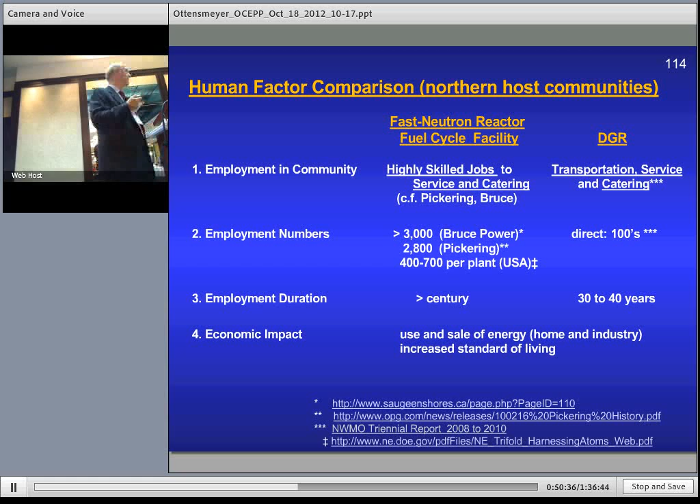So I've indicated to you that waste management is about 2 times less costly than burying the material. Never mind that you create electricity and reduce the radiotoxicity. I've indicated that the technology is available today. It's not something that's decades down the road. And I'll try to show you that we actually may have startup funds for this from the Nuclear Waste Trust, those $2.3 billion that have been collected.

Because the Nuclear Fuel Waste Act, in Section 20, that's what created the Nuclear Waste Management Organization, says that, if you'll forgive the breaks here, that's all the legalese and the boilerplating in there. This is just the heart of it. If a new technological method is developed that has been reviewed by experts from international governmental organizations, we can't do it ourselves, we have to get other nations into it and receive their support, then the Nuclear Waste Management Organization may propose this new approach for the management of nuclear fuel waste. Well, those funds are for the management of nuclear fuel waste. So if we can just persuade them that they should go in this direction, we have potential funds available.

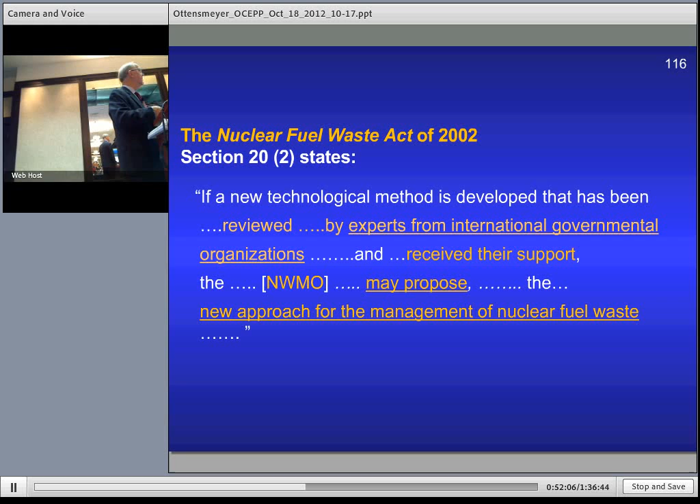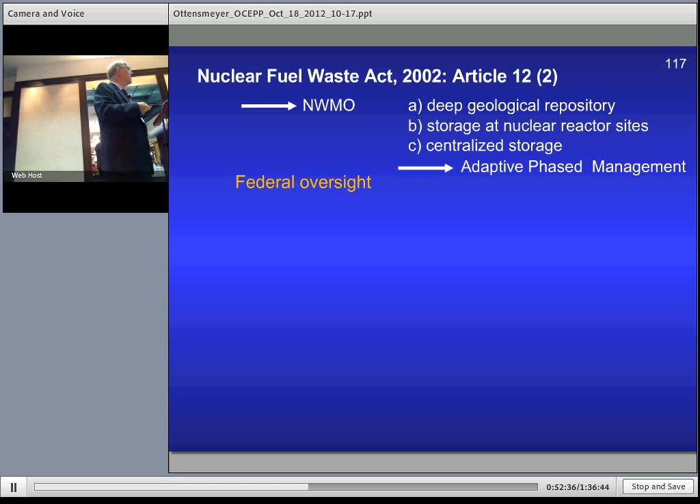There's a problem, of course, that the Nuclear Waste Management Organization has its marching orders from the Nuclear Fuel Waste Act, and that says look at a deep geological repository storage or centralized storage, and they wisely adopted a combination of things and a go-slow approach called adaptive phased management. But when I go to the federal people, because this is federal oversight basically, then they hesitate if I say, well, I want to eliminate the nuclear fuel waste productively by producing electricity at the same time.

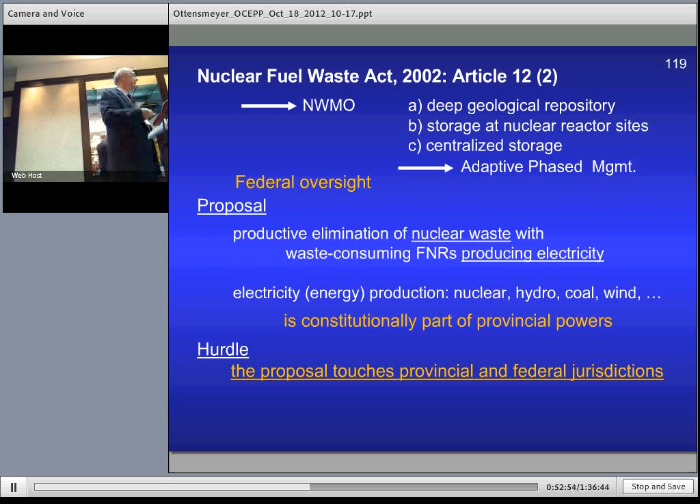And the reason they hesitate is that we've got a constitutional problem, because electricity production or energy production, whether it's nuclear, hydro, coal, wind, or anything, is constitutionally part of provincial powers. And so the proposal here touches both the provincial and the federal jurisdictions, and that's a little tough. And in addition to that, of course, we have party considerations, which are Liberals and Conservatives at the moment. So if there's anyone in the audience that can stickhandle through this, I would really like their assistance. Because I don't think I'm going to stop trying to persuade people, but it's more efficient if you do it with knowledge.

So in summary then, there are benefits to the fast-neutron reactor fuel cycling approach, which I've indicated. It's a very large reduction in waste decay times, a very large reduction in long-term radiotoxicity, and this tremendous gain in non-carbon energy. Some people may say, well, that should be number one. Well, any reactor produces a lot of energy. So I think getting rid of the nuclear waste in this productive way is much, much better. I've indicated that the EBR-II-like reactor has inherent safety features which were demonstrated by the USA. That reactor ran for 30 years. The Russians have run their reactors for over 40 years or 30 years as well, and so has France. So we've got reactor-years of experience with these types of reactors.

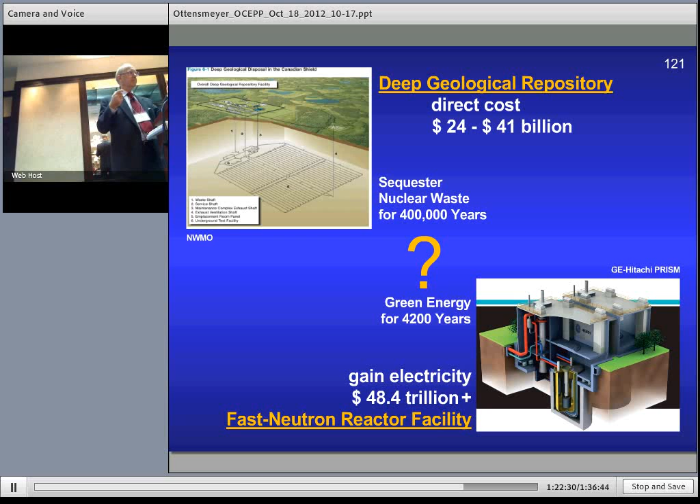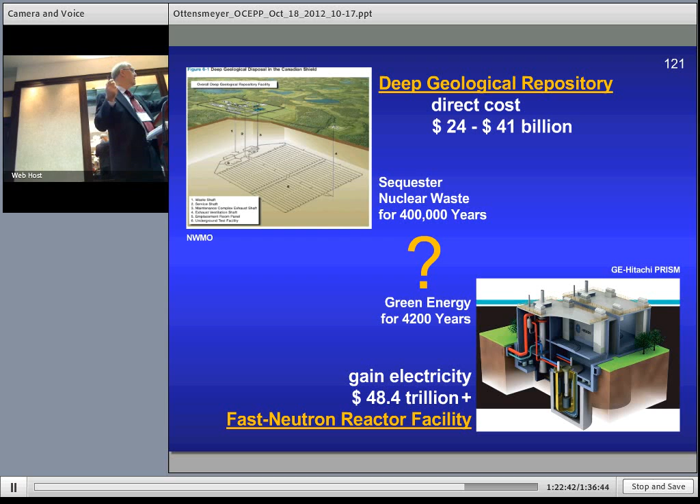We have AECL that has hot cells, which are ideal for the fuel cycle facility. In terms of size, let's see, can I go back a few? The fuel cycle facility isn't very large. If you look at the footprint, the reactor building isn't very large, and this may be a footprint that's twice as the footprint of this. So it's not very large at all.

But it would be excellent, say, to put at the Pickering plant, because it's about to be shut down. So you've got lots of used fuel, but they're transporting it to the Bruce site, I presume. So might as well do it at the Bruce site. But the Nuclear Waste Management Organization has to move all of that used fuel to wherever they're going to have their DGR. And so you're going to move fuel that way. So it doesn't matter where you build one of these facilities, really, you can always move the fuel to that facility. And I think it can be virtually entirely Canadian if we put our mind to it.

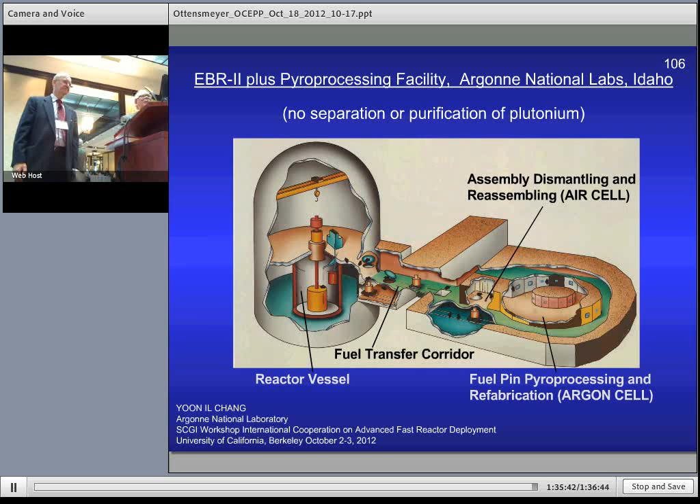All right, and with that, do we have the room for a little while longer? Okay. You might be able to continue some discussions for the next few minutes until they kick us out, but anyways, I hope that we do hear from you. I think this would make an interesting opportunity for the Centre to delve into its mandate of trying to bring engineers to talk to government directly about engineering solutions to problems in society, and this is definitely one of them. And so if you're interested in the working group, please let us know. Thank you very much, and I hope you come to some more summits.

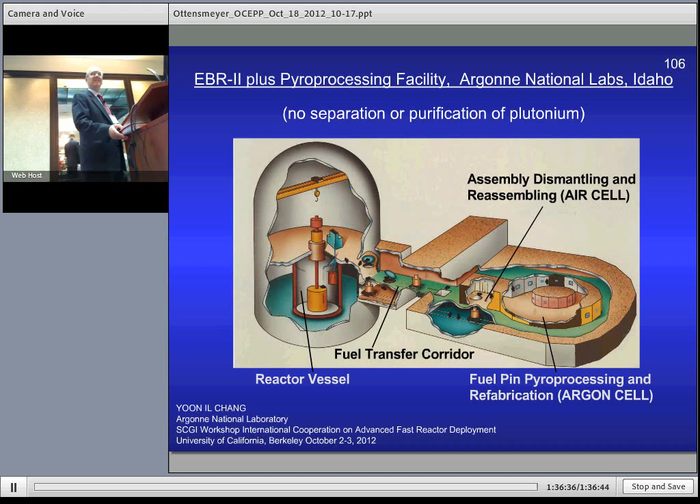Picture with you with one of your slides, your favorite slide. Okay. You like this one? Oh, right up here. Doesn't matter. Okay, big smile. Looking here. Hang on, and big smile. There we go. Okay. Excuse me, I just want to take a slide. Can you just back up a second? Great. Good. Thank you.